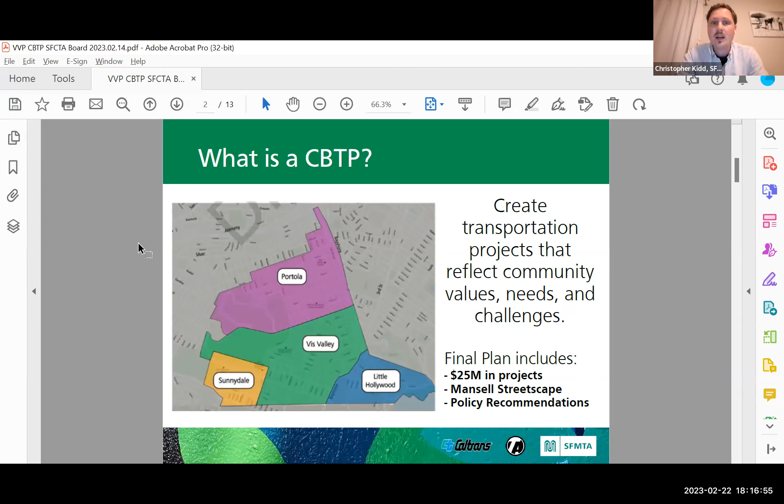We had an enormous number of collaborators through this project, including Caltrans and the SFCTA, but also the offices of Supervisors Hillary Ronan and Shamann Walton, and a lot of local neighborhood partners and organizations as well. As part of that outreach, which spanned over a full calendar year and 3 distinct phases, we had paid contracted partnerships with the River of Life Church in Vis Valley and Family Connection Centers in the Portola.

As part of our work, we committed ourselves to providing all of our project materials in 5 different languages, including Chinese, Spanish, Filipino, and Vietnamese. And in the workshop that we provided, we also provided simultaneous translation.

During those 3 phases of public outreach, we engaged over 2,600 residents, which is very difficult to do during COVID, and collected almost 900 surveys and hundreds of written comments.

I think telling, especially for this outreach work, is that from our survey results, it was more than 3/4 residents of color, and more than 60% of those people had incomes under $75,000 a year, which really meant that we were accurately representing the demographics of the community at large.

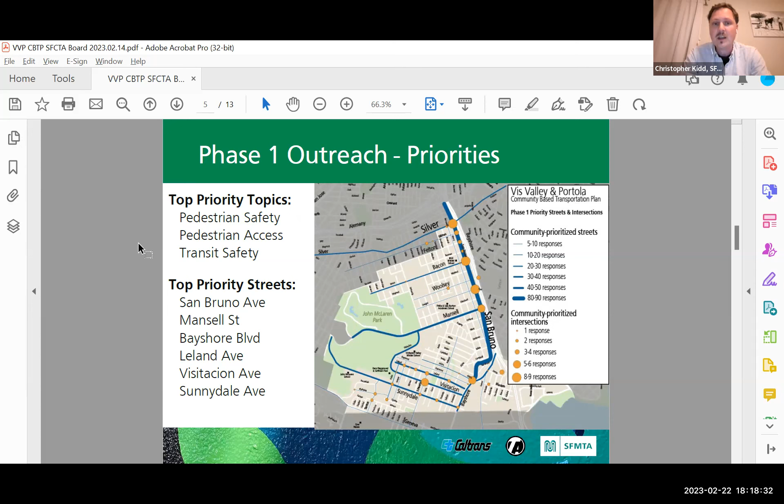In our second phase, we took all of that input that we got around priorities and locations and turned them into a series of projects that we felt responded to those needs. We then brought that back to the public this past summer and allowed them to tell us which ones they liked, which they didn't, which we needed to remove, where we had projects missing. I think the telling thing out of all of that is that all the projects we did solicit input on did receive a 50% or more favorable rating, but some much higher in favorability than others.

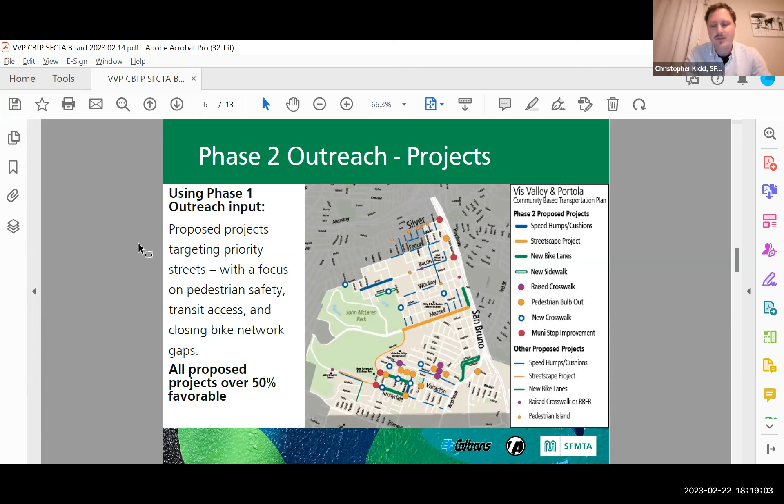During phase 3, we revisited and revised that project list into a final project list based on the input we got in phase 2. In phase 3, which ran from November through this January, we brought the draft plan back to the public, as well as the final list of projects, and asked them to rank those projects in surveys. And we committed ourselves to saying that the resident input alone would be determining the order of implementation for those projects after plan adoption.

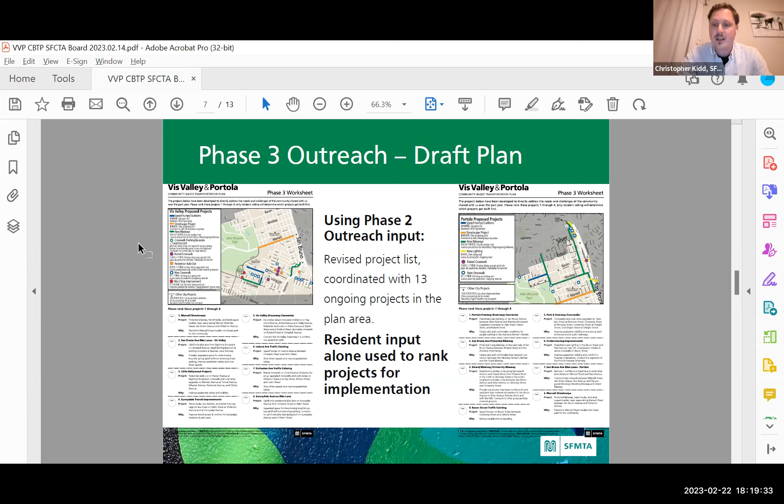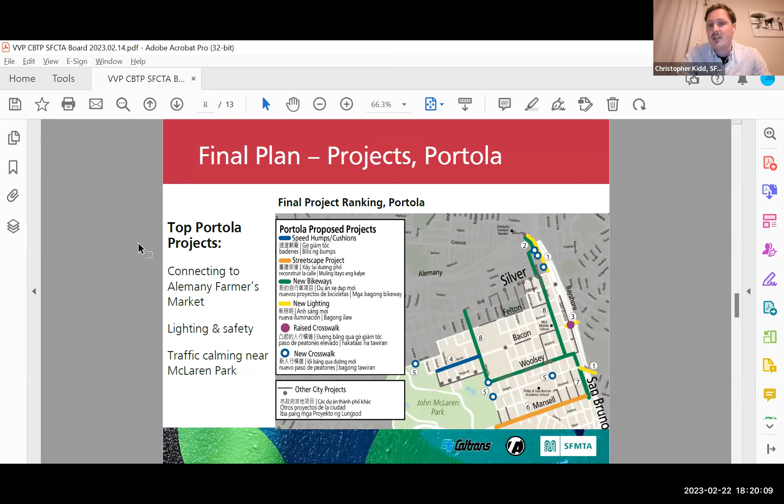In terms of a little more detail around the final plan and the projects it proposes, in the Portola, really the top 2 projects, the very highest priorities, were increasing access and safety to the Alemany Farmers Market, extending the Freeway Greenway and the work that the Portola Neighborhood Association has done from Silver Ave all the way up to Alemany, including pedestrian scale lighting and a more protected and comfortable bike route. That was the highest priority, although there were other priorities, including some other pedestrian lighting and some traffic calming and access improvements to McLaren Park.

In Vis Valley, the responses were much more varied, and so there were a lot of projects that were kind of middle ranking because some people liked them a lot and others didn't. Among those middle-ranking projects, the ones that ranked the highest were providing an uphill bike lane on San Bruno Avenue to connect the bike network between Bayshore and the existing bike lanes on San Bruno, doing the Mansell streetscape, which I'll show a concept design of on the next slide, and connecting the Vis Valley Greenway, which is a series of mid-block parks that right now don't have any crosswalks for you to get from one section of the Greenway to the next, going up the hill in Vis Valley.

So we had an idea to be able to connect those pieces of the Greenway with a series of raised crosswalks.

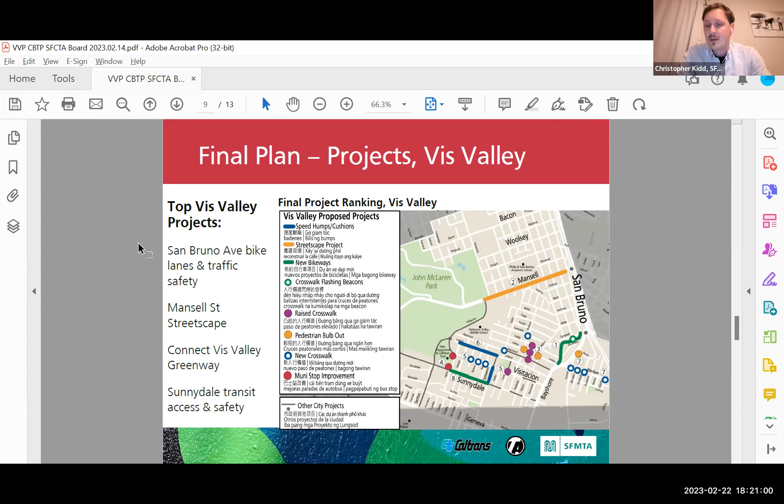In terms of Mansell Street, this is a street that has a lot of opportunity, and we also got a lot of interest from the community in being able to really transform this space. So we decided to do a concept design rather than just identifying a project. We developed 3 different concept designs, which we brought to the public throughout phases 2 and 3 for what we could potentially be doing on this street. This is one of them. It would include building a 2-way protected bike lane facility or a shared use path on the north side of this very wide median that's on Mansell Street.

This is a street that's on the high injury network that connects to McLaren Park, and it has this very large median that is currently unused. So there's a lot of opportunities for things like public art, gathering spaces, or programmed space that's going underutilized today, which there's a lot of interest from the community in creating. We want to see if we can create a transportation project that can improve access to that space and allow it to become programmed and flourish, while also improving things like our transit access, improving safety in the neighborhood, and improving access for people accessing the park.

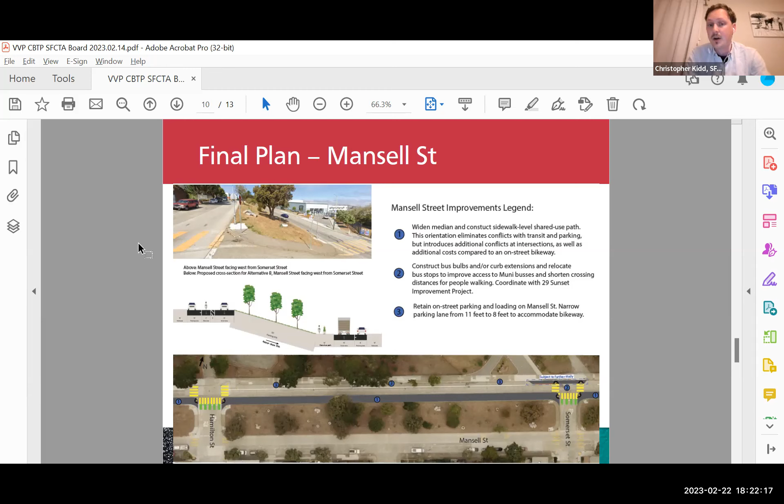What we heard so far is that there's a lot of concern around traffic safety on that street, and making sure that any project we bring will make the use of that median space safe for the public, as well as specific comments around addressing safety near the high school and making it safe for people using bikes on that roadway.

This is a process that'll go beyond the plan itself, where we need to continue working with the community around design that really responds to their vision for Mansell Street. But we believe this could be a very competitive grant application in the future, probably for the 2024 Caltrans Active Transportation Program.

We also wanted to make sure we were reflecting what we call policy recommendations—the needs, challenges, and desires of the community that aren't addressed through the infrastructure projects we identified. That includes continuing our community partnerships with local organizations, and having a renewed focus on safety for transit, both riding transit and waiting for transit, as well as connecting people on local trips.

Vis Valley is a very hilly neighborhood, so mobility is a really big challenge, and we need to account for that, especially with the very diverse community there. That leads into needing to improve our multilingual access to services, making sure people who speak other first languages can access the full range of SFMTA services. We also recognize this is an incredibly diverse community.

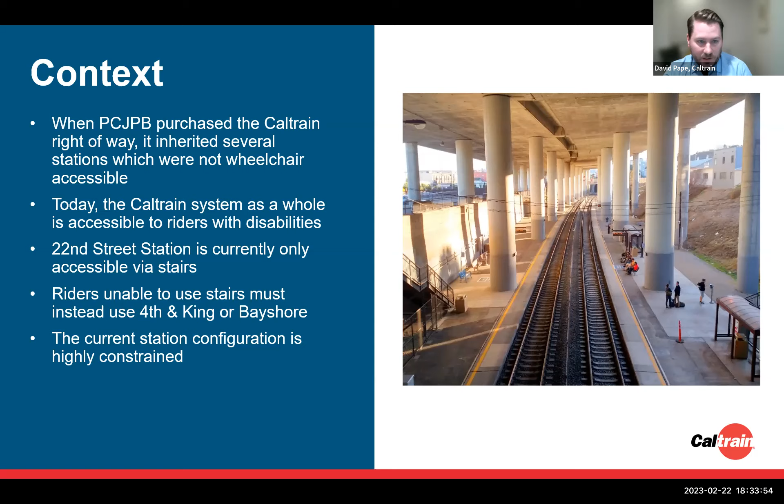In addition to the station's existing physical constraints, the study also had to consider that there are a couple of long-range planning efforts that could potentially relocate or rebuild 22nd Street Station. The first is the Pennsylvania Avenue extension, which would shift the approach to the future 4th and Townsend Station to an underground tunnel. The San Francisco County Transportation Authority is leading the preliminary environmental and engineering work for the PAX tunnel, and one of the outcomes of that work is to determine the changes required at the existing 22nd Street Station.

In addition to that, the San Francisco Planning Department also conducted the Southeastern San Francisco Rail Station Study, or SERSS, which examined potential locations for a future Caltrain station or stations in Southeast San Francisco. This study considered multiple options for keeping 22nd Street Station in its current location and explored options for building a new station in a nearby location. Because of the potential long-term implications of these efforts, these studies need to be a consideration as the access improvements effort advances, and we will continue to coordinate with these efforts as things advance.

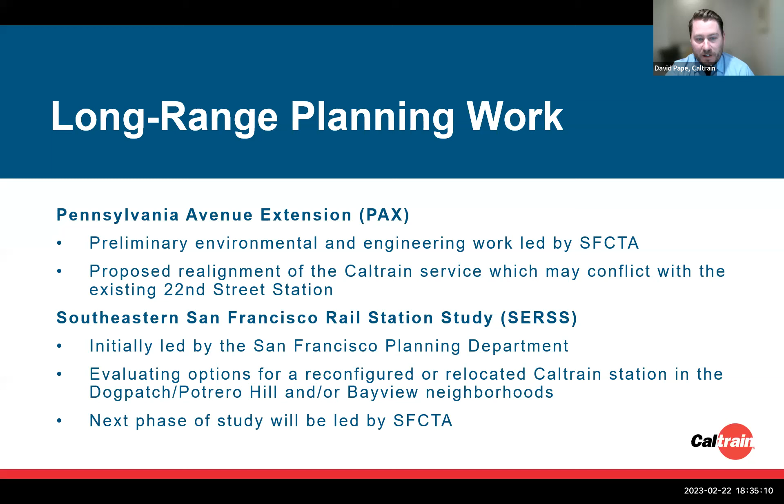This study was kicked off in February of 2020 at the request of District 10 Supervisor Walton. The scope of work was primarily focused on determining whether street-to-platform ADA access improvements are feasible within the existing station. It's important to note that because this is a planning-level study, the engineering analysis was very much at the conceptual level. And since the options for longer-term station relocation and rebuild are being explored, the scope was focused on access improvements that could be implemented within the existing station footprint, to ensure that any recommended alternative could work as a near- to medium-term solution.

After identifying both feasible ramp and elevator alternatives for each of the platforms, we analyzed how they could be built, how long they might take to implement, and how much they would cost. In addition, we also looked at potential funding opportunities for the proposed improvements.

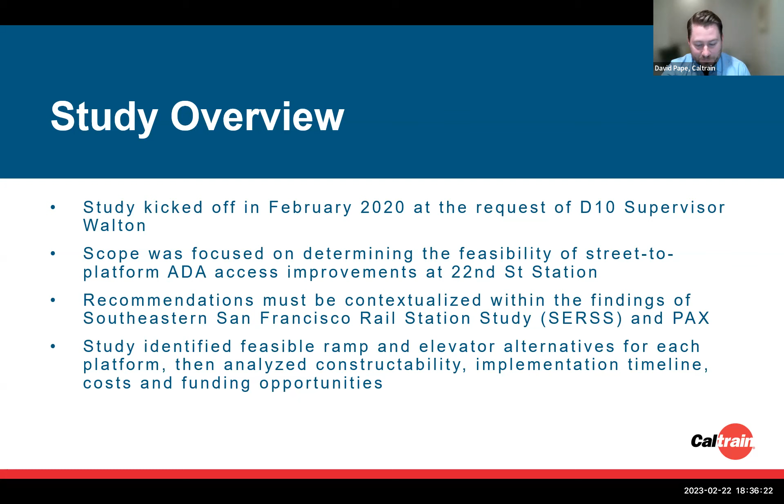In addition, we also conducted several rounds of outreach throughout the course of this study. The study's core stakeholder group consisted of representatives from the list on the top of the slide. Feedback from these stakeholders really informed the design of the conceptual alternatives, as well as the criteria we used to evaluate the options and ultimately recommend an alternative for each platform.

In addition, we also conducted outreach efforts beyond what was originally scoped, to include more accessibility-centered groups, which you see on the bottom of the slide. We did this to make sure that we were hearing from the individuals who would most depend on the facilities to access Caltrain service.

In terms of the feedback, one of the most consistent pieces we heard from stakeholders was that ramps are generally preferred over elevators. The reason is that many cited experiences where elevators are regularly vandalized and users often feel unsafe using them. Our stakeholders also acknowledged that elevators naturally require a significant amount of maintenance and tend to be out of service frequently. I think we've all experienced this at different transit stations. And when the elevators are out of service, you're back to square one.

In the case of 22nd Street, that means back to just stairs. And while there are certainly a number of downsides to elevators, stakeholders also acknowledged that implementing ramps at 22nd Street Station would likely come with their own challenges. A big part of this comes from the fact that the distance between the platforms and the streets is fairly high, which means the ramps between them have to be significantly long. Interestingly, despite this, a few of our stakeholders advised us to decrease the slopes of the ramps if possible, essentially saying that if the ramps were inevitably going to be long, they shouldn't be as steep.

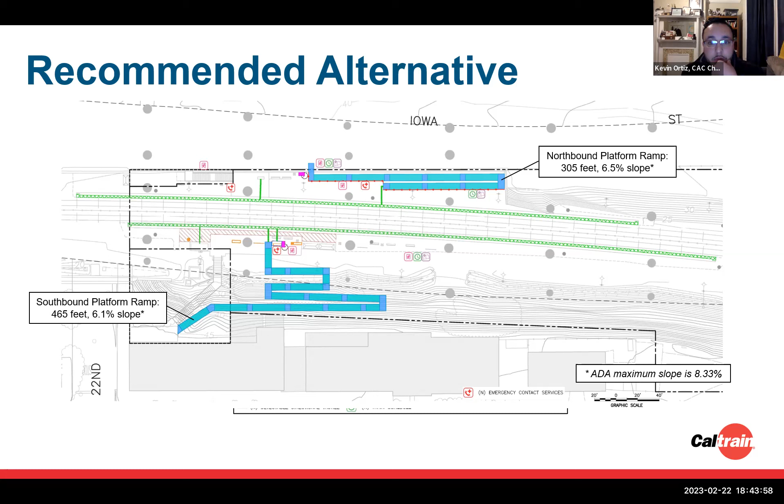Great. Do we have any other questions from members? Seeing none, let's open up for public comment.

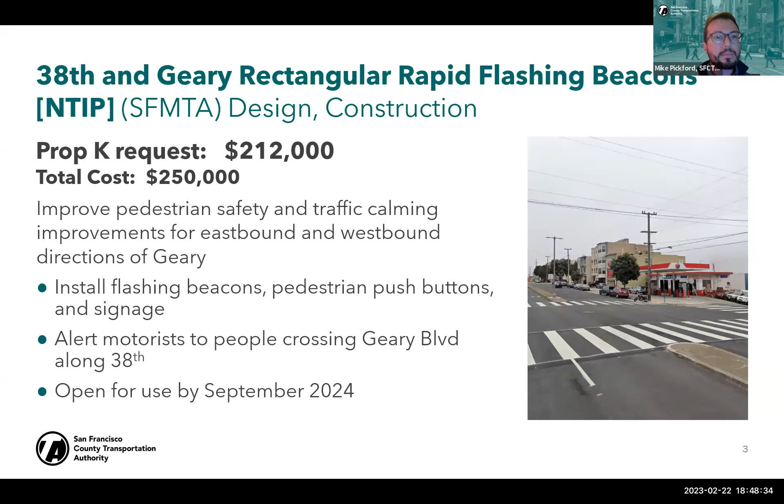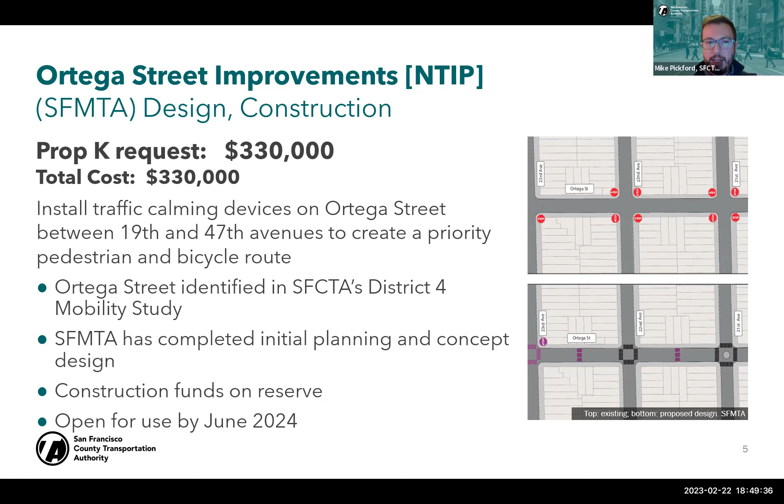And then the implementation funds would be released by the board after the study is completed and recommendations are finalized. Next up is Ortega Street improvements in District 4. This project would design and construct traffic calming and safety measures such as speed cushions, crosswalk striping, daylighting at intersections to improve visibility, and traffic circles at two intersections. This would be all along Ortega between 19th Avenue and 47th Avenue. These improvements are recommendations based on the Transportation Authority's District 4 mobility study, which included data analysis and community outreach.

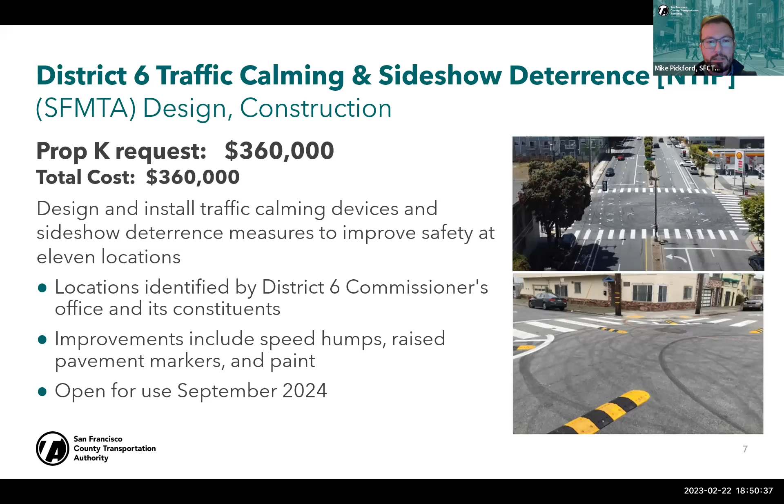We have a second District 6 request, which would fund design and construction for traffic calming measures such as speed humps, new raised crosswalks, as well as some measures intended to deter sideshows at intersections. The locations proposed have been identified in consultation with the District 6 office as well as community members, and the list of the 11 locations is in your packet.

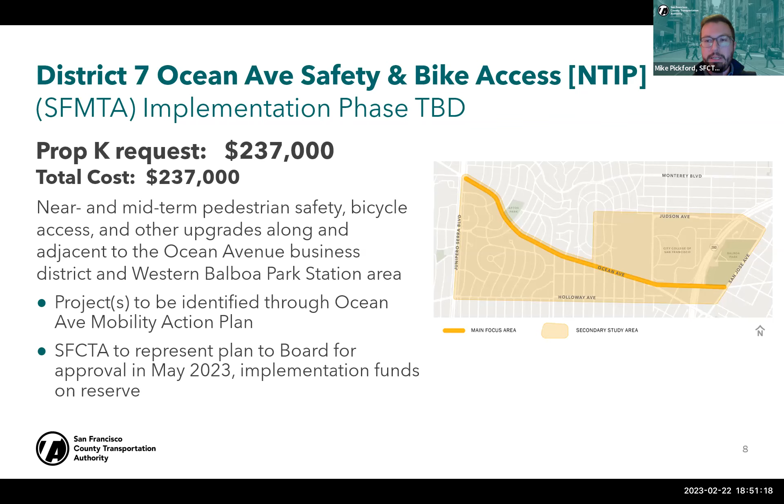Next up, the District 7 Ocean Avenue Safety and Bike Access Project would implement recommendations from the ongoing Ocean Avenue Mobility Action Plan, which is expected to be completed this spring. The project team anticipates improvements including pedestrian safety upgrades along Ocean Avenue, traffic signal equipment, striping and signage upgrades, left turn traffic calming, and improved bicycle connections. Similar to previous requests, these funds are on hold until released by the board pending approval of the plan.

Next in District 8, the Next Generation Sanchez Slow Street project will design and construct a new generation of slow street infrastructure, including traffic diversion via traffic calming islands and permanent metal wayfinding signs on Sanchez between 23rd and 30th. Similar to before, $190,000 of this amount would be set aside for construction, to be released once design is complete.

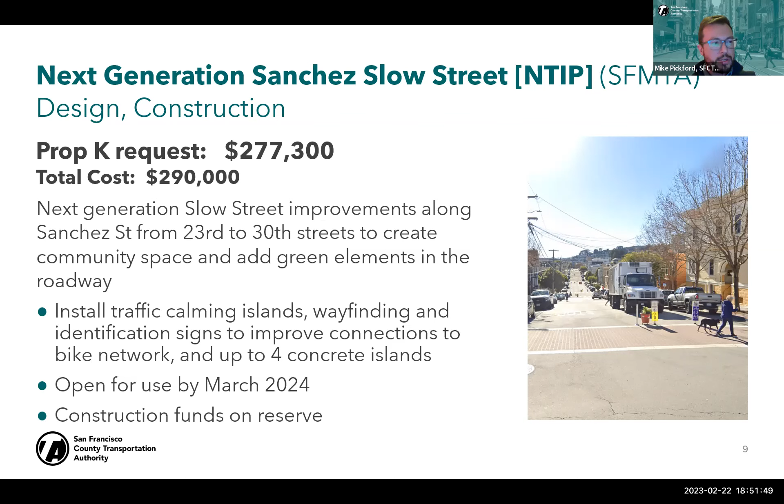In District 9, the Valencia long-term bikeway study will investigate long-term concepts for safety and streetscape improvements between Market and Cesar Chavez. The study will include technical analysis, stakeholder outreach, and conceptual engineering for pilot blocks that could test potential long-term configurations. The study is expected to be completed by the end of 2024.

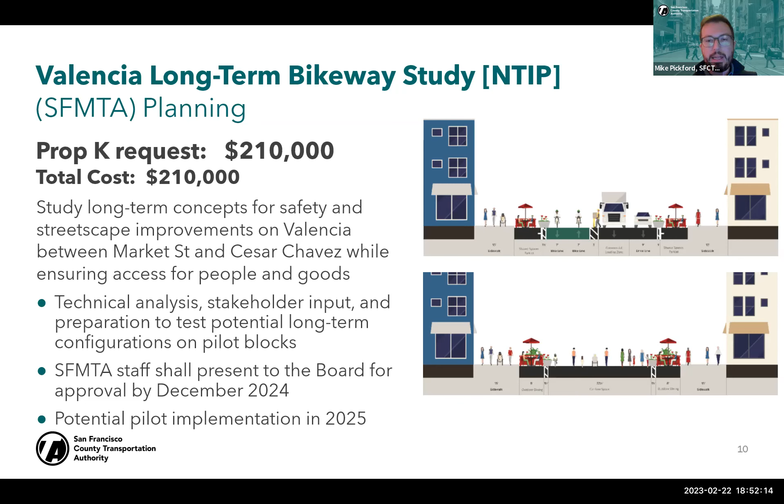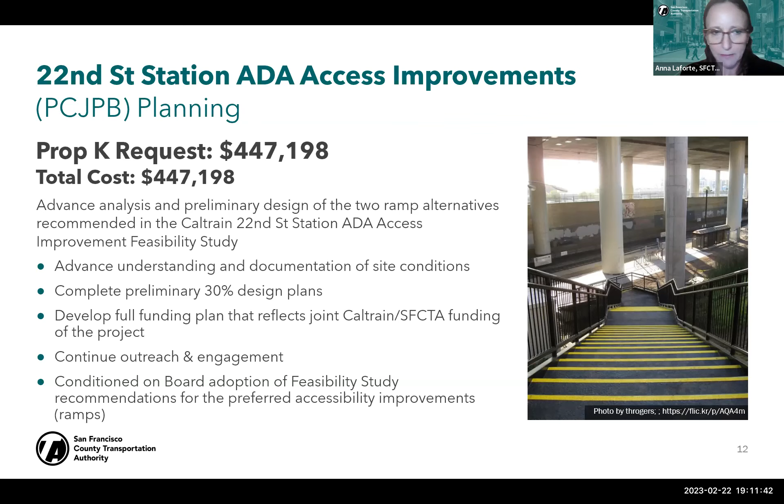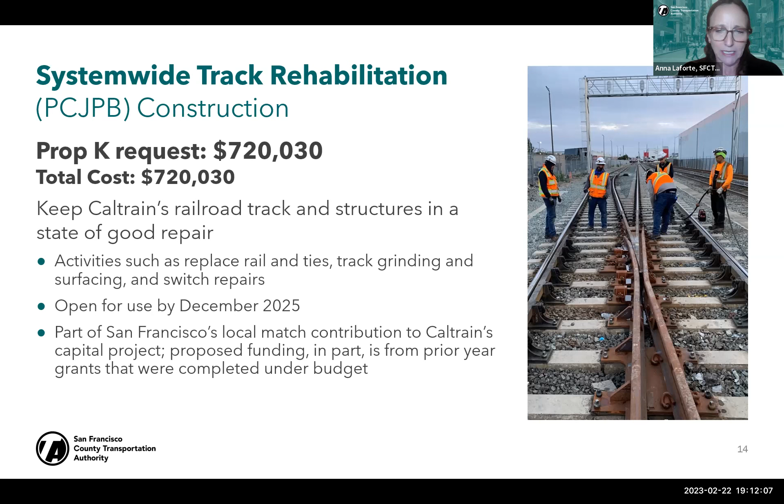System-wide track rehab—again, this is a state of good repair program of replacing rails and ties and track grinding, and doing some of the nuts and bolts for rail maintenance for their capital program.

Next slide, please. This is the first of 2 requests from Public Works for curb ramp projects. These are for various locations around the city—45 ramps at 10 intersections. What I'll highlight is that a couple of locations will trigger the de-energization of overhead lines, in particular at 30th and Judah and also at Turk and Kittredge, which will require de-energizing those overhead lines for a couple of weeks during construction.

The locations are primarily identified through citizen complaints and requests, but the Mayor's Office, the Mayor's Office on Disability, and the Department of Public Works work together to prioritize these locations as well as others.

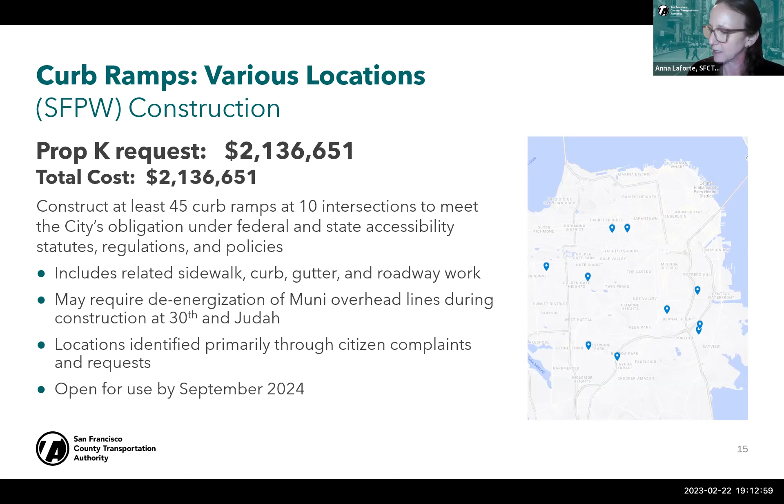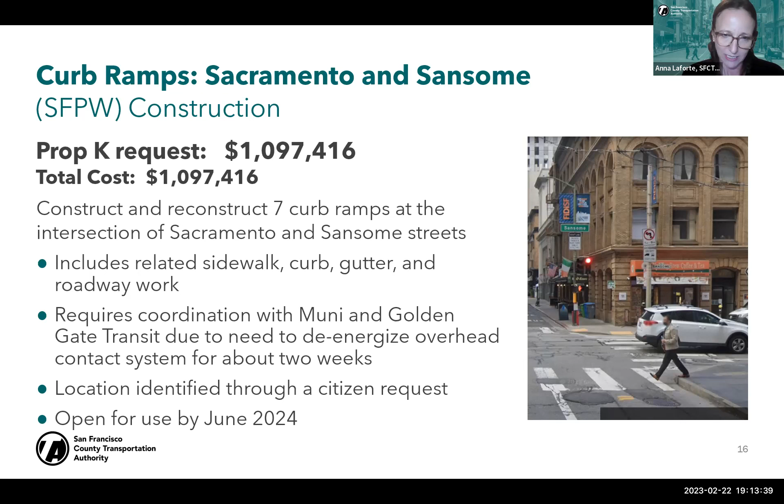On the next slide, this is also a citizen complaint or request that has been evaluated for this intersection at Sacramento and Sansome, to upgrade the ramps and bring the intersection to be fully ADA compliant at the curbs. The intersection has a lot of sub-sidewalk basements in the vicinity, so the cost per ramp for this project is higher than the prior request you just saw. This will also have some de-energized overhead contact systems necessary for both Golden Gate Transit and Muni.

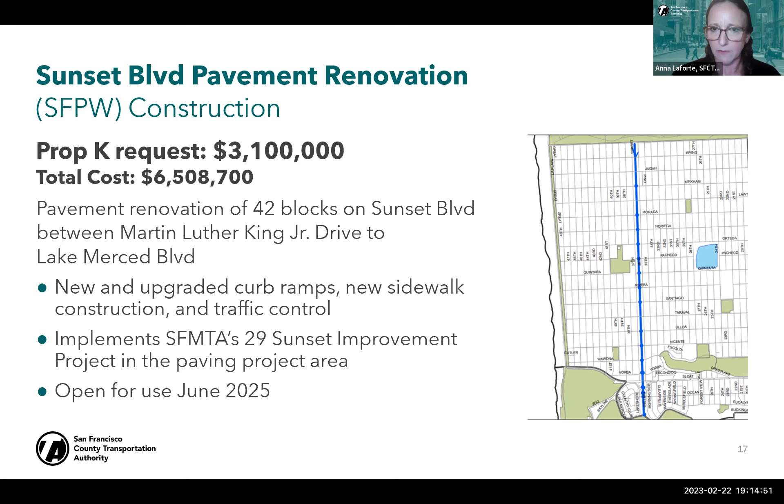There are 34 ramps potentially for implementation that are being under consideration, and then there are 8 curb ramps that are known to be constructed. So we're still sorting out the final scope elements for the ADA-related improvements.

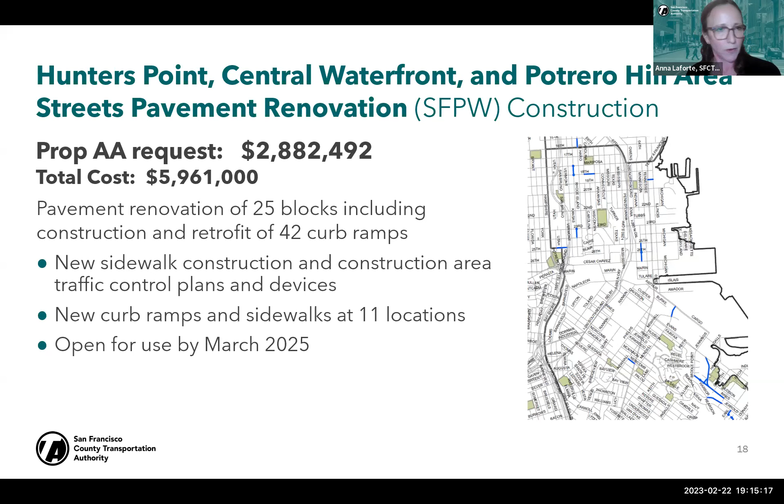Hunters Point, this is a joint PUC sewer project that the Public Works paving project will be joining, with various locations throughout the project area and curb ramps as well, and all of the curb-to-curb work that is associated, including traffic control. This is from Prop AA funds. That's the one request that's from the vehicle registration fee.

The next series of requests are from the SFMTA. The first of these is for the Kirkland Yard electrification project. MTA is going to be adding battery electric buses to its fleet, and these are expected to be received and put into revenue service by 2027. Kirkland Yard is on that critical path, retrofitting the facility with EV charging infrastructure to allow the buses to be an operational fleet.

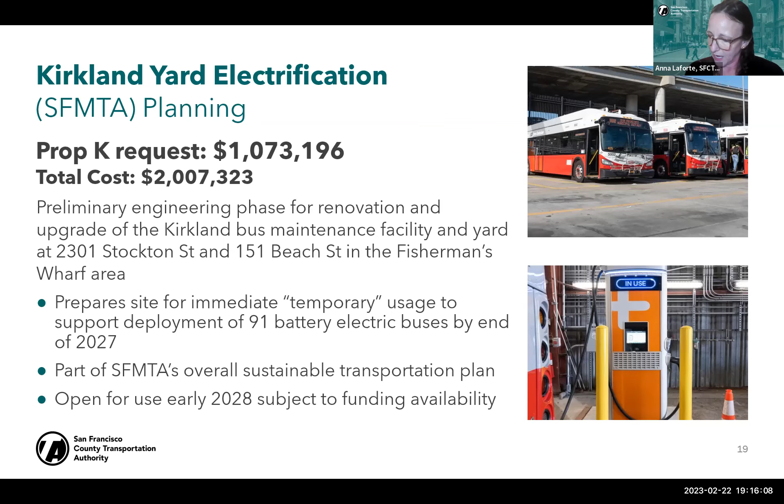This phase that we are funding tonight would be to come up with the 30% design drawings, a schedule, and cost estimates for implementation, and I think that's what I will highlight on this one. Thank you.

The next request is for additional funds for a signal upgrade project and also for conduit improvements at Clay and Grant, and Stockton and Sutter. We have previously allocated Prop K funds to this project. Since that time, there have been schedule delays and also cost increases, primarily from the most significant scope addition at Stockton and Sutter, to remove an existing signal from a historic PG&E pole and relocate it to another pole to improve the existing signal visibility and infrastructure at that intersection.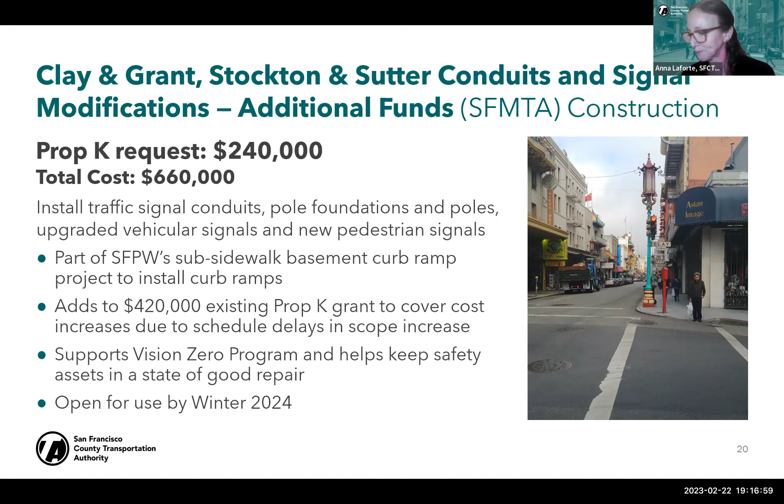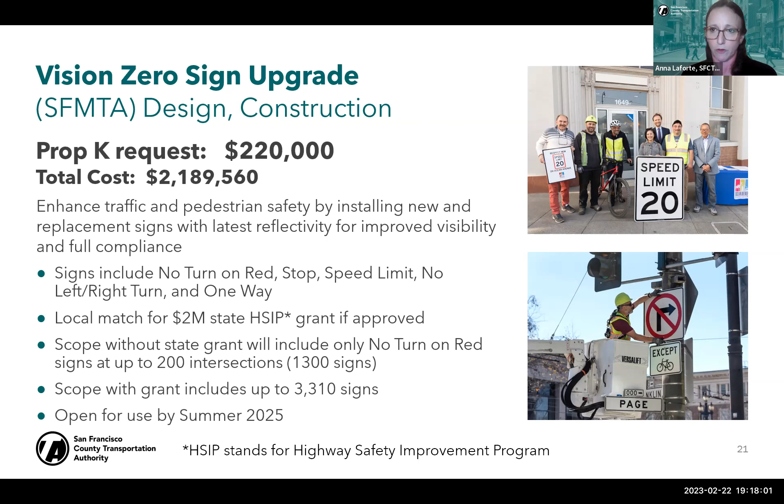This Vision Zero sign upgrade project has a disclaimer: MTA has a grant application into the state of California for a Highway Safety Improvement Program grant for $2 million. We're waiting to see if MTA has been successful in obtaining that grant. If so, the scope will include a wide range of signs, including no turn on red, stop, speed limit, no right or left, and one way signs throughout the city, and Prop K would provide the 10% required local match to the state grant. If MTA is not successful, they will still implement the no turn on red portion of these signs, at up to 200 intersections, primarily in the northeast sector, where crash concentrations are the highest. This is to upgrade signage for visibility improvements and full compliance as the intended goal for safety on the streets.

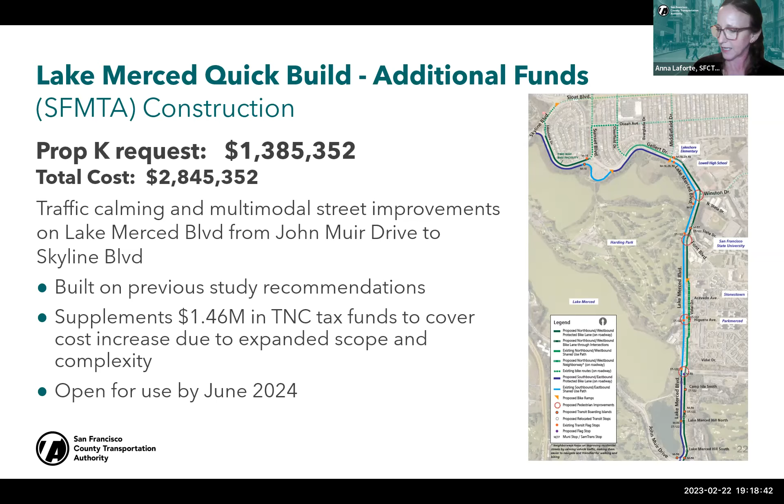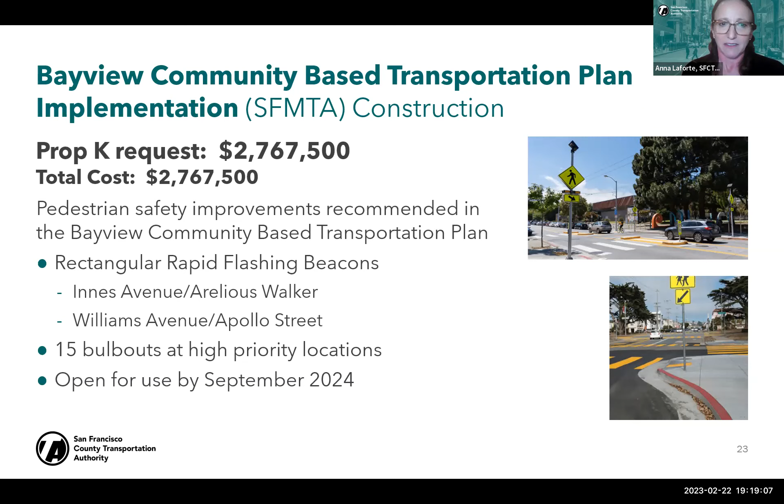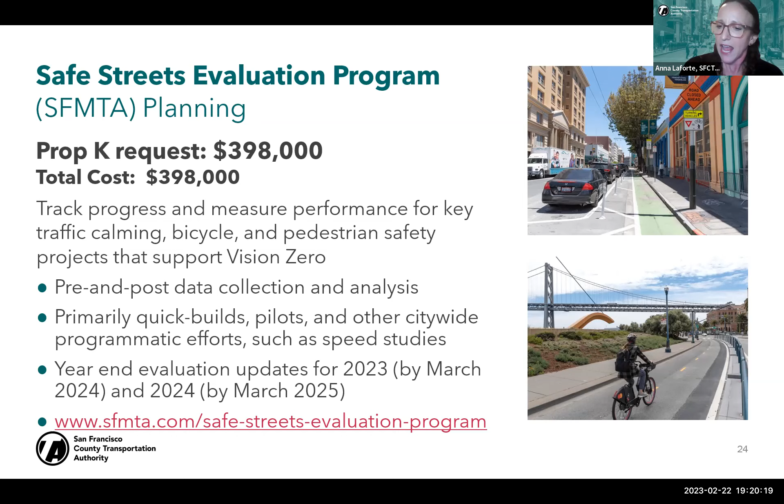With that, I'm going to ask Eliza Paz to present this last request of this grouped item.

Hello, thank you Anna, and good evening CAC. My name is Eliza Paz, Principal Planner with the TA in the Planning Division. This request is for about $406,000 to conduct a Transportation Demand Management, or TDM, travel market analysis. TDM involves low-cost capital projects, programs, and policies to shift when and how people travel to maximize the efficiency of our transportation network and support mode shift.

This project will identify travel markets best suited for TDM investments due to factors such as trip types, travel distances, transit effectiveness, land uses, or inequities in the transportation system. It will develop an updated TDM toolbox along with evaluation guidelines for TDM projects going forward. The study will also supplement the MTC Regional Travel Diary Survey to increase the San Francisco sample size to support this effort, and is expected to be completed in summer of 2024.

With that, we have lots of project managers here to answer questions from the CAC.

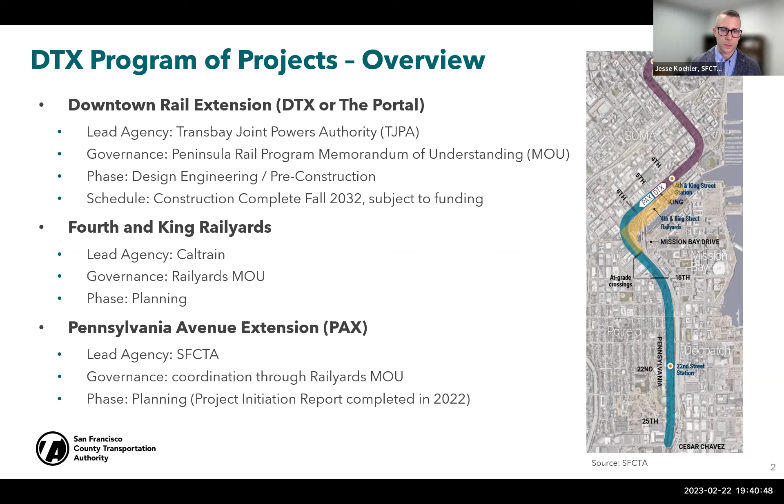TJPA has requested the allocation of $10 million in Prop K funds to advance engineering design development and procurement preparation for DTX.

These activities are a key component of the broader pre-construction work program for DTX, through which TJPA and its agency partners have been working together to meet the requirements of the Federal Transit Administration for candidate projects that intend to seek funding from the FTA New Starts Grant Program.

The DTX project plans to seek a New Starts grant to fund up to 49% of the project's cost. This will be a federal grant of well over $3 billion.

There is currently an intense focus and alignment across the DTX project team in order to put the project forward to the Biden-Harris administration for this substantial federal investment. Earlier this month, the TJPA board authorized an interim submission to the FTA, which keeps the project on track to secure this federal grant by early 2025.

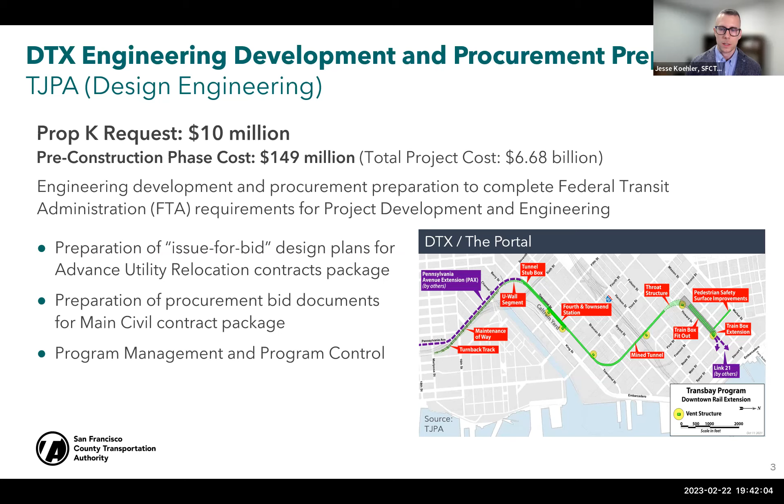The $10 million request before the committee this evening will specifically fund the preparation of design plans for utility relocations, development of procurement documentation for the tunneling contract, and program management and program control activities.

As is typical for major projects under the Prop K program, the recommended allocation to TJPA identifies several special conditions. In this case, for DTX specifically, there are a number of conditions related to the development of the governance approach for the project as it moves toward construction.

Project development work for the DTX project has been governed since 2020 by the Peninsula Rail Program Memorandum of Understanding, under which 6 agencies, including TJPA and the Transportation Authority, are working together to bring the project to ready for procurement status. This multi-agency approach to develop the project stemmed in part from the recommendations made in 2019 by an expert peer review of the project, which was commissioned by the Transportation Authority Board.

Under this existing MOU, the Transportation Authority and the Metropolitan Transportation Commission are jointly developing a set of recommendations for project governance to succeed the existing MOU and to support the needs of the upcoming procurement and construction phases of the project. These recommendations are planned to be brought forward through the MOU and TJPA board process in April and May of this year. For the subject $10 million request, this allocation is recommended to be conditioned on future presentation regarding these governance recommendations and the planned approach to project governance during project delivery.

$4.7 million out of the total $10 million is recommended to be placed on reserve for future release by the board following this presentation on governance.

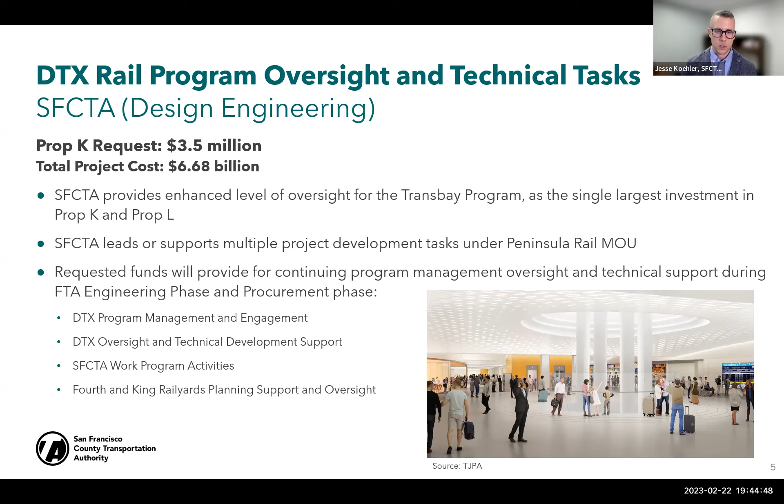The final request before the committee is for the Pennsylvania Avenue Extension pre-environmental bridging study. Last year, the Transportation Authority completed the PAX project initiation study, which undertook an initial technical evaluation of design concepts for the PAX project. This next phase of work is intended to prepare the project technically and organizationally for potential future advancement into the environmental review process.

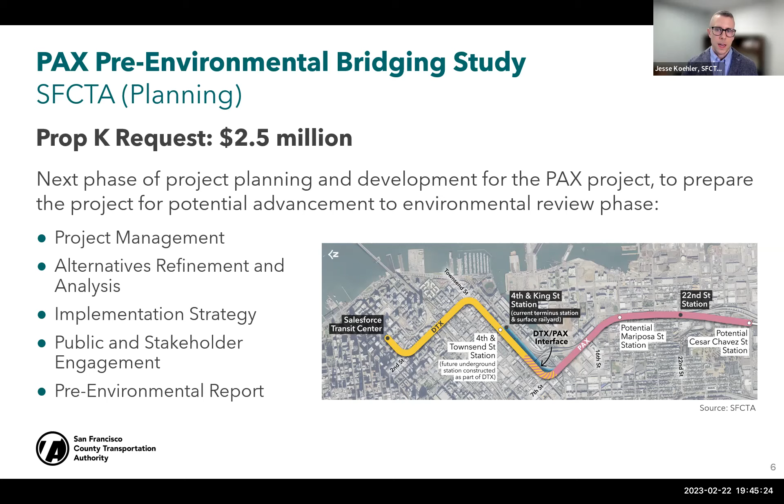This bridging study will undertake further technical analysis, deepened work with Caltrain and other project partners, and project-specific engagement with the community and stakeholders.

That concludes my staff remarks. I'm happy to address questions, and as I noted, TJPA staff is also with us this evening. Thank you.

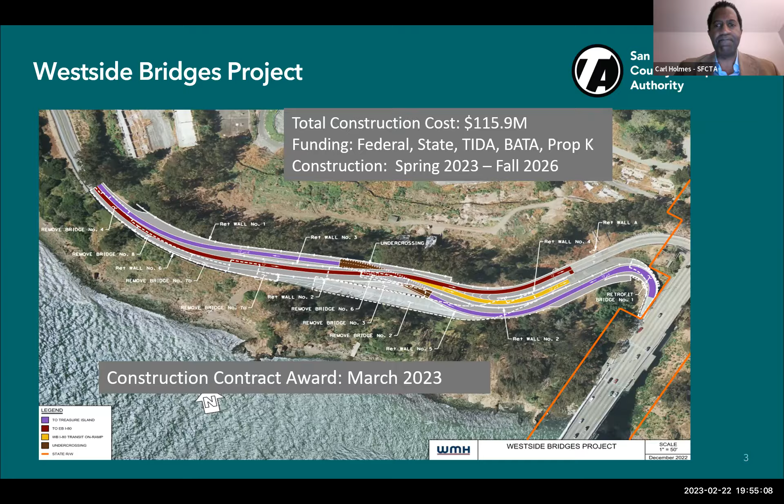Want to take an opportunity to thank all of the key stakeholders and funding partners. I won't go through each of them, but you can see them on the slide.

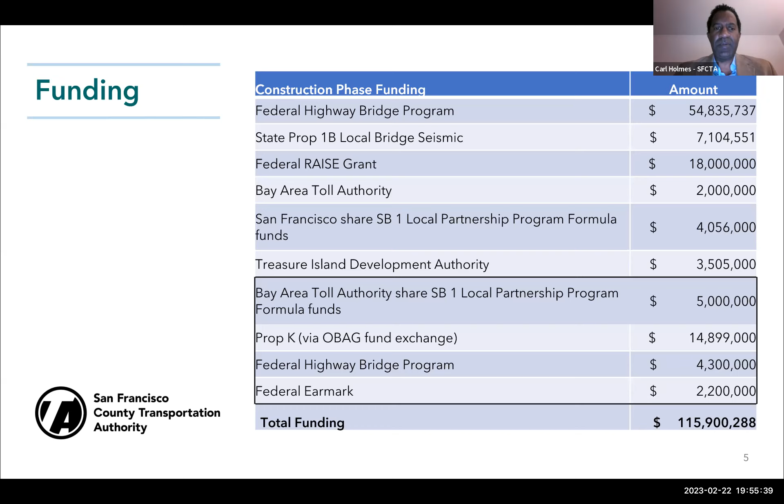This is a listing of all of the funding partners and all of the dollar values associated with this $115.9 million fully funded effort that we're about to embark on.

This shows the cost of the base construction, the additional construction allotment, and the construction engineering. The base contract is $84 million, as Chair Ortiz mentioned. The additional construction allotment includes a 10% contingency of roughly $8.5 million, roughly $2 million of financing costs, and an additional just under $5 million of supplemental items, including owner furnished materials. That brings us to $15.2 million. The construction engineering includes work needed by the designer, the construction management team, and SFCTA staff.

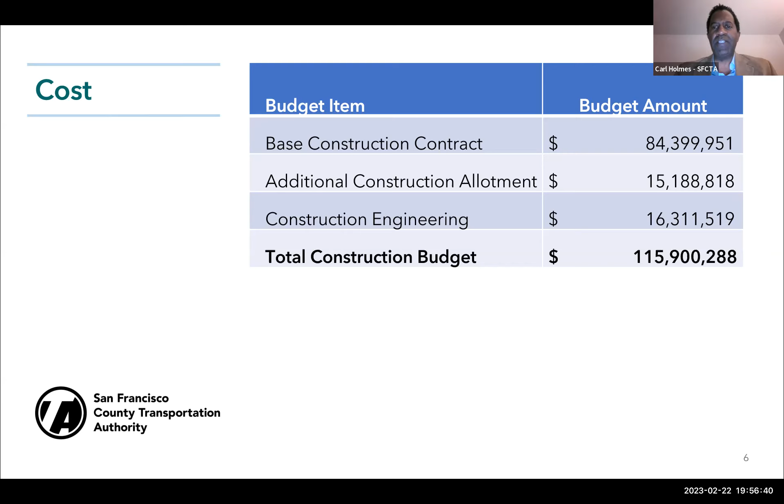On the schedule, I'd like to focus your attention on the middle of the slide showing the Forest Road detour, which I showed in the bird's eye view in pink. That needs to open in June of this year in order for us to start construction. If you backtrack on this slide, you'll see that your approval is critical for us to take this to the board in March, which would allow us to execute the contract. Starting construction in June of this year, we're pushing towards completion in December of 2026. Then we have a 3-year period to evaluate the performance of the improvements installed, leading us to December of 2029.

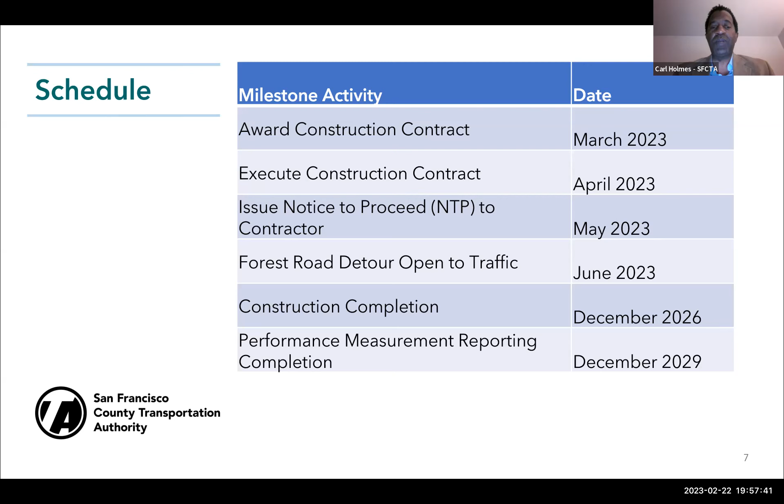Wanted to give you a little bit of insight into the construction contract. This is using a project delivery method called construction manager and general contractor, also known as CMGC. This delivery method was authorized by the board in March of 2018, and we awarded the contract in October of 2018. Since that time, we had been working on advancing the design with the benefit of having a contractor on board to help educate the design process and provide estimates along the way, going from 30% design to 60%, 90%, and 100% designs, which allowed us to have cost estimates. The process yielded a construction estimate from the contractor, and a construction estimate by our engineer.

We also had the benefit of an independent cost estimate that allowed us 3 data points. This independent cost estimate is a number we had and never disclosed to the contractor, but it allowed us to have 3 data points. We're happy to say the contractor cost was within 3% in terms of cost difference between the independent cost estimator and the construction contractor estimate. We're also pleased that we're projecting almost 13% DBE participation, which exceeds the goal of 11%.

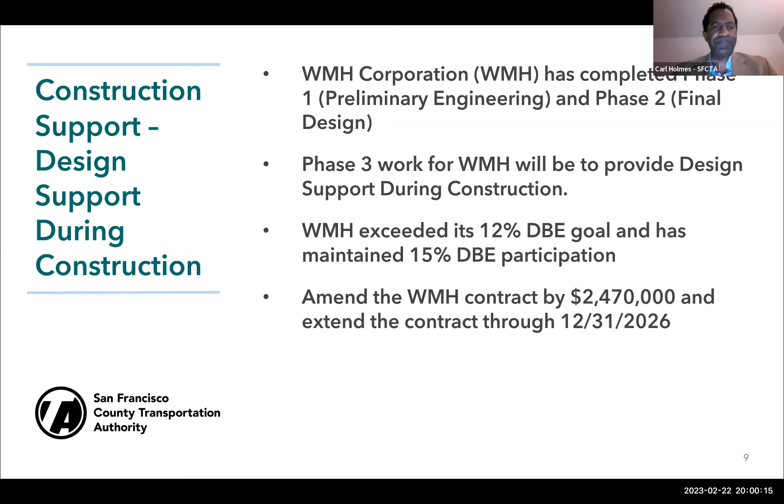We also have a construction management service that will be performing management on behalf of the TA, Transportation Authority, and we are seeking approval to amend the contract with WSP, valued at just under $6 million. They will be the key staff managing the project for us, working not only with the contractor directly, but also with TIDA, Treasure Island Development Authority.

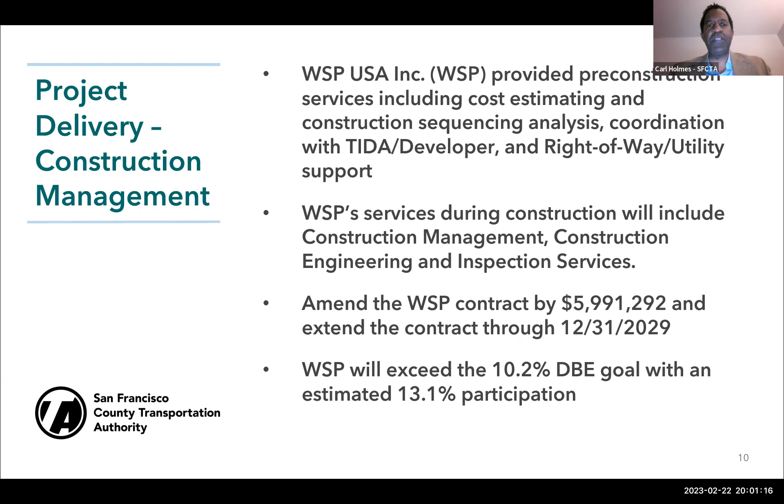TIDA is the department under the city and county of San Francisco, and we'll also work with other departments such as Public Works and MTA, and even Caltrans. They are also projecting 13% participation for DBE, which is also exceeding the goal of 10%.

Any project has risks, and I wanted to highlight some unique risks in addition to the unforeseen conditions that a project generally has to encounter. These four are with the Public Works Department. We're working with them directly, and we have a construction permit that we expect to receive in March. We don't have it yet, but we're working closely with Public Works and expect to get that next month.

We also have a couple of funding obligations that need to be finalized, namely with the Federal Highway Administration and Caltrans. The funds are programmed, however they're just not fully obligated yet, and we're working closely with those agencies and expect to have those finalized next month or early April.

Also, the Southgate off-ramp, which I showed you earlier, we expect to open in April, and that needs to be open in order to allow access onto the island once we close off for West Side Bridges construction. And then, of course, the Forest Road Detour, being completed by the developer, Wilson-Meany, is expected to be completed in May.

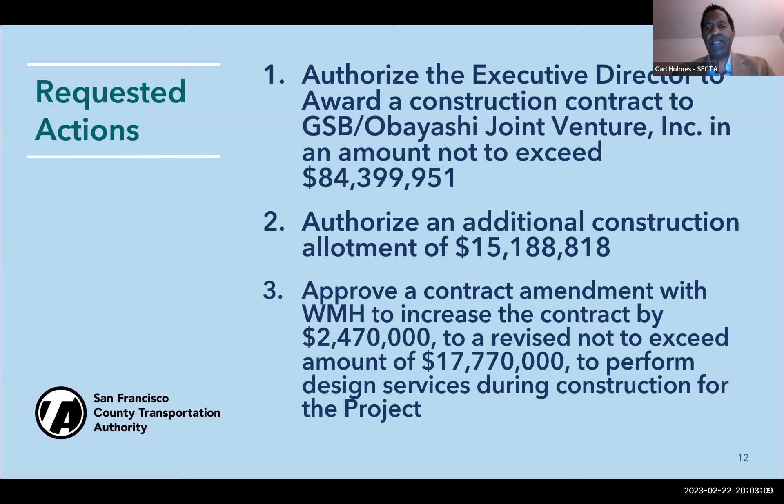These next two slides itemize the six actions we're seeking CAC approval for. Item 1 is the contract with the joint venture. Item 2 is the additional construction allotment. Item 3 is the design support during construction. Item 4 is the construction management services.

Items 5 and 6 authorize the executive director to enter into agreements and to negotiate non-material terms. An example of what we're asking in those two items is that we are working with TIDA to have a construction MOA in order to perform work on the island. We will also be engaging with Public Works on the construction permit, and they will be providing oversight, as well as we anticipate agreements with MTA and Caltrans. I believe that concludes the presentation, and we're open for questions and comments. Thank you.

Great, let's open it up to questions from members. Member Bars.

Thank you, Chair Ortiz. There's a lot involved in this project, and it's also a pretty significant investment, which is why I want to make sure I fundamentally understand: is this adding any new highway miles, or is this just retrofitting what exists and strengthening it?

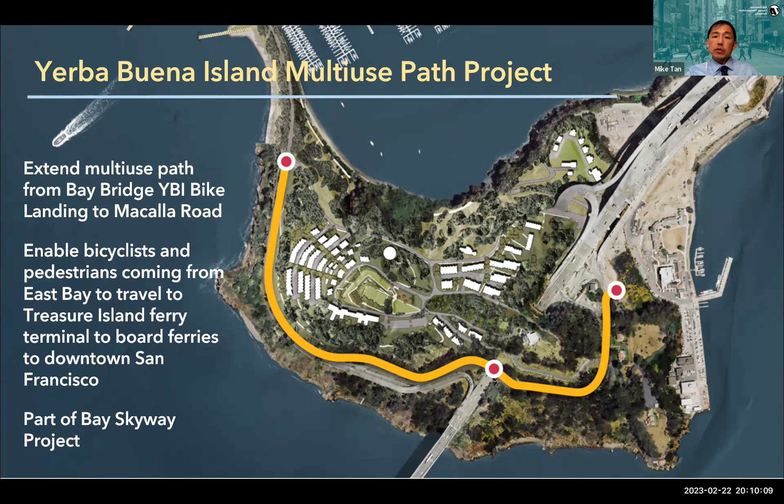Let me go over the current preliminary project schedule. We are currently in the preliminary engineering and environmental approval phase. We're hoping to get CEQA approval by spring. We've worked on this in the past, and a feasibility study was completed a couple years ago. We're continuing the preliminary engineering and hoping to get NEPA approval by summer of this year, which will hopefully set things up for the final design of this project.

We're looking at between mid-2023 to 2025. If everything goes well, we're hoping to start construction in 2025 and complete it by 2027. One reason for this schedule is that there are other projects, such as the West Side Bridges project, that we're hoping to take advantage of during the window when Treasure Island Road and Hillcrest Road will be closed for those projects.

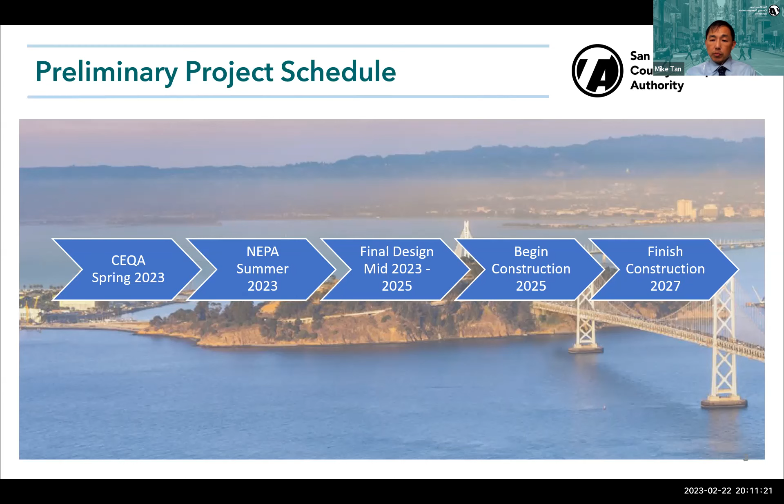As far as the current multi-use pathway project, we're looking at a project delivery method where we take the path I showed earlier and segment it into 4 different segments. That's our current approach, but it may change since we're still early in the design process.

Segment 1 is next to the YBI Bike Landing Quarters 9 and the Southgate project that is under construction and finishing. Our project is right next to the Southgate project, and we're looking to deliver that as a future standalone project. Segment 2 will be from Forest Road to the West Side Bridges, and will be part of the Hillcrest Road widening project, where we'll widen Hillcrest Road to meet modern city standards and also take advantage of that project to put in the multi-use pathway.

Segment 3 is with the West Side Bridges project. Our portion of this project is that we're hoping to actually restripe parts of the West Side Bridges project. That project is going to put in a class 2 bike lane. There is still wide enough shoulder area, so we're looking to restripe that for the multi-use pathway project.

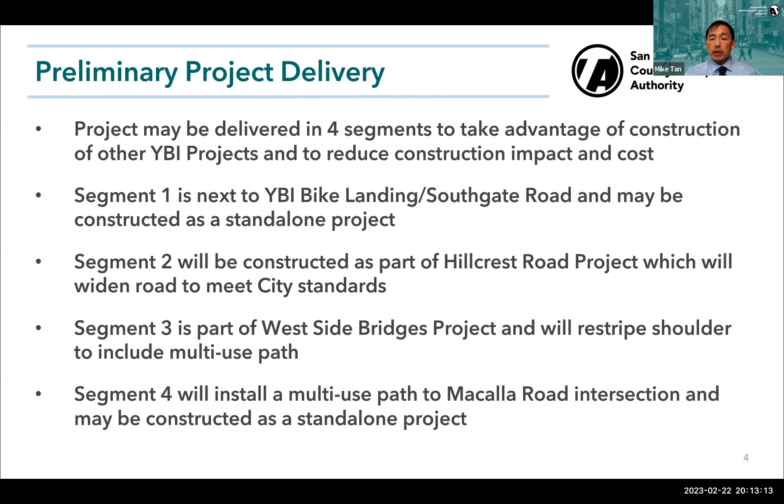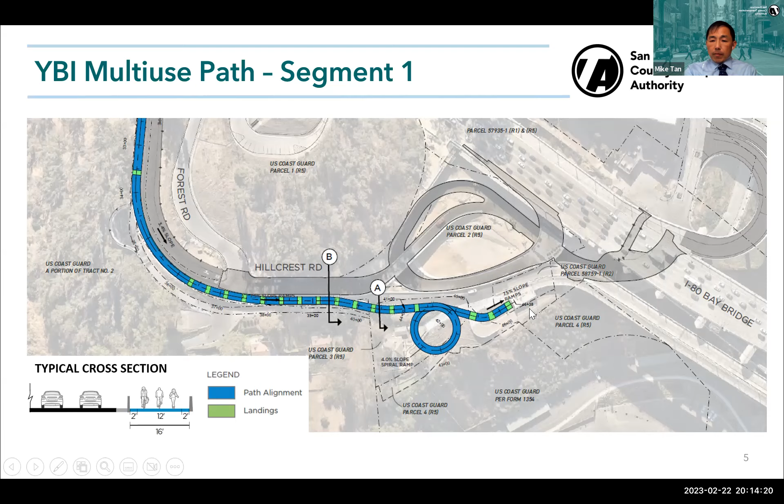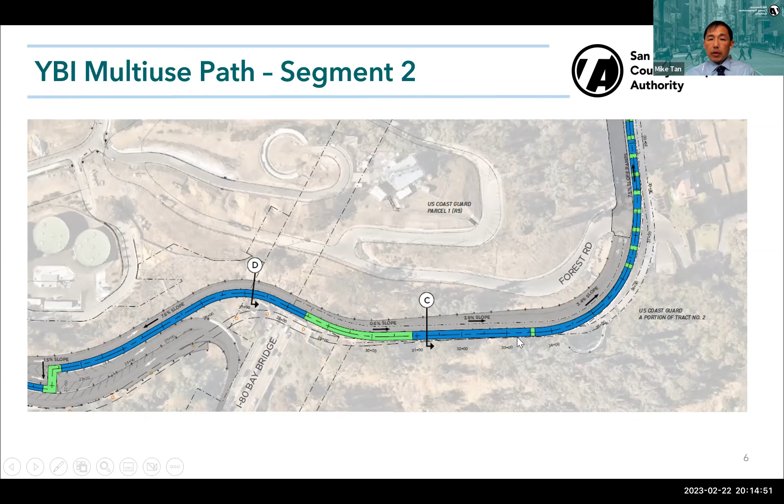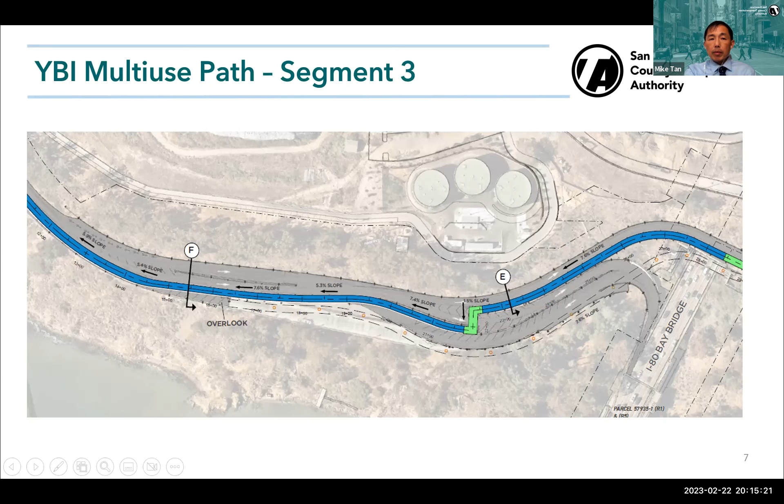Segment 3 is for West Side Bridges, and there is really no change to the West Side Bridges project except restriping. Just for continuation from the Hillcrest project, as the bicyclists and pedestrians reach this particular location, there will be a crosswalk, and they'll continue on their multi-use path on the shoulder of the West Side Bridges project that we're striping in. Again, this is mostly at grade.

Segment 4 is all the way to the Macalla Road intersection, in which we are looking at continuing this at-grade alignment. There may be possible widening of this segment. This is something that we are still exploring.

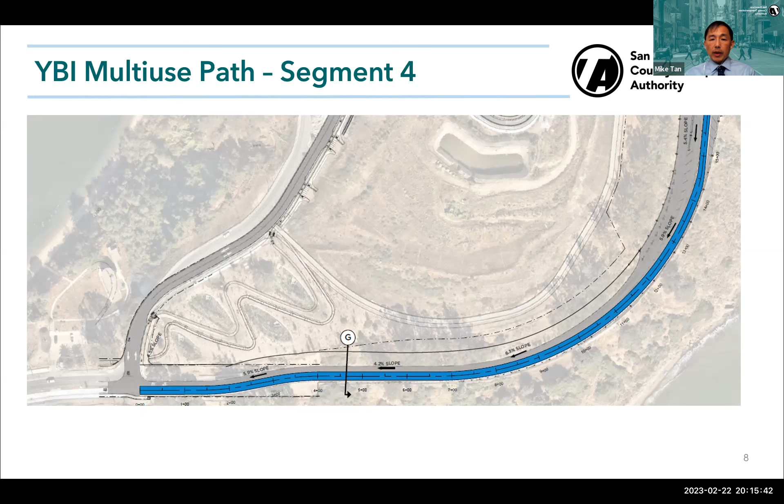Let me go over the preliminary funding for this project. The total project costs we're looking at, for preliminary engineering, design, and construction, are $78.8 million. Preliminary engineering is roughly $2 million. Design is about $6.8 million, and we estimate very early on that construction will cost roughly $70 million. We expect this to come from a variety of funding sources, including federal and state funding, and also some regional funding.

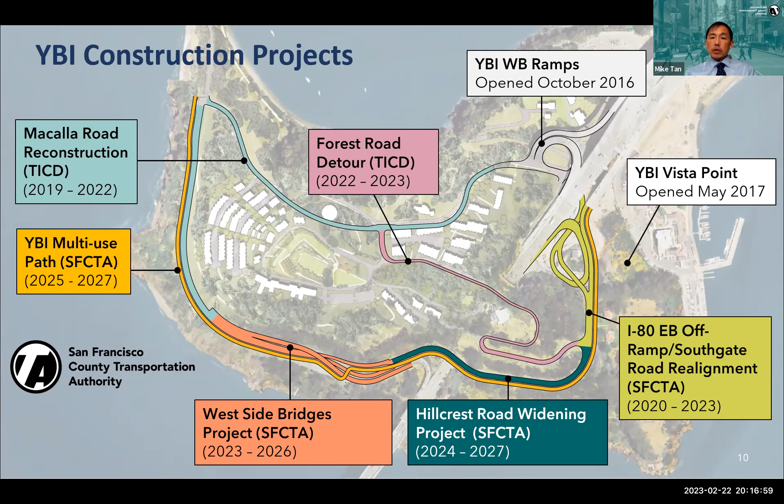This is a map you've seen before of all the projects out there. I just want to highlight that for the YBI multi-use pathway project, we are this orange path on the outside of all the other projects along Treasure Island and Hillcrest. This of course includes the West Side Bridges, the Hillcrest Road, and Southgate projects. Our timeline, we're hoping to get out to construction by 2025 to take advantage of the other projects. This concludes my presentation, and I'd be happy to take any questions.